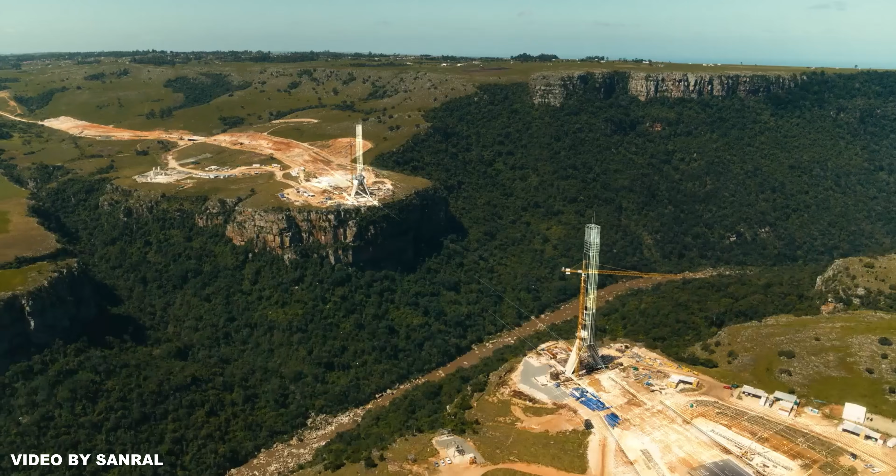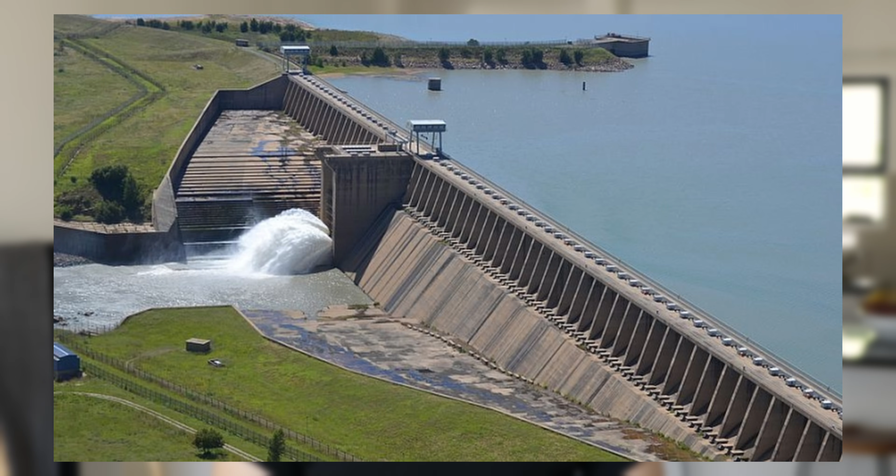I know a lot of the time I talk about old South African infrastructure, things that have been here for a while, pre-1994, but here's something cool that's happening right now.

The N2 Wild Coast project is a major infrastructure development initiative that spans 410 kilometers along the Wild Coast in the Eastern Cape. This project is being undertaken by the South African National Roads Agency, SANRAL as we know it, and is expected to significantly transform the region's transport network and have a socio-economic impact on the landscape there. The project is part of a broader initiative to enhance connectivity, improve road infrastructure, and stimulate development in one of the most economically disadvantaged regions of South Africa.

The new road will link East London to the KwaZulu-Natal border with several upgrades and new road sections to improve access between the Wild Coast and the rest of South Africa. This project is being developed in phases and is expected to be completed in the coming years. When it actually is completed, that's another story, but hopefully it will get completed.

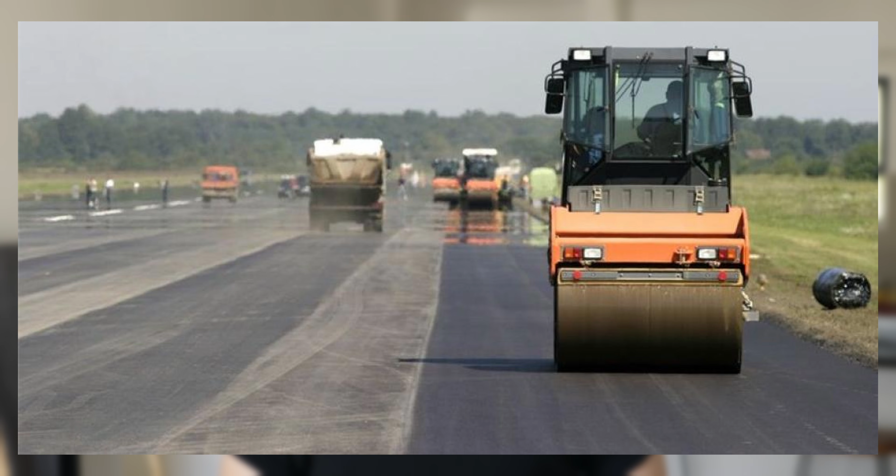There are a few key components of the project, namely upgrading existing roads such as the N2 highway between East London and Mthatha, as well as the R61 road between Mthatha and Ndwalane. These upgrades will improve the quality of the roads, making travel safer as well as more efficient.

Another major aspect of this project is the creation of 96 kilometers of new highways, which will provide a much needed greenfields route across the Wild Coast. Greenfields being where they construct something brand new in an area that hasn't had development before.

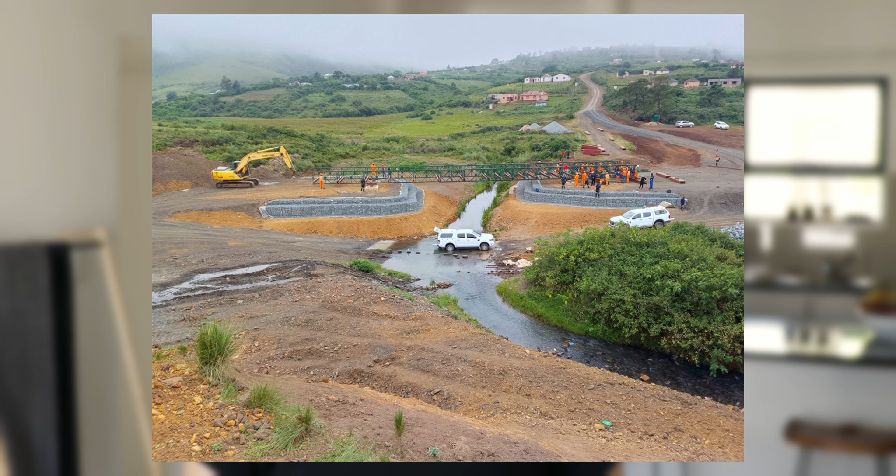As part of this project, new access roads will be built to connect various local communities to the N2 highway, improving accessibility to remote areas. These upgrades are expected to have a major impact on quality of life for residents, making it easier to access health services, schools, and other essential facilities.

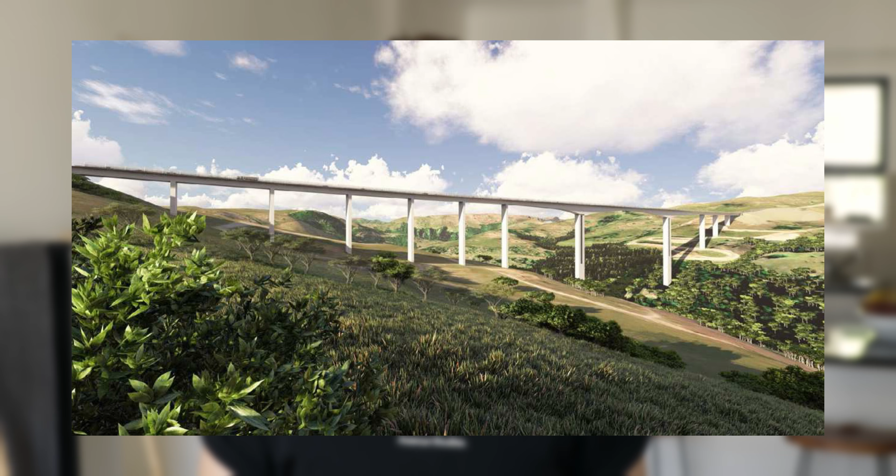The final component of the project is the exciting part, the construction of two massive bridges, the Msikaba Bridge and the Mtentu Bridge. The Mtentu Bridge is set to become the highest bridge in Africa, while the Msikaba Bridge will cross a deep gorge and serve as a vital link in the region's infrastructure.

So let's talk about these cool bridges. I love bridges, they're so fascinating, and they're such an amazing marvel of engineering.

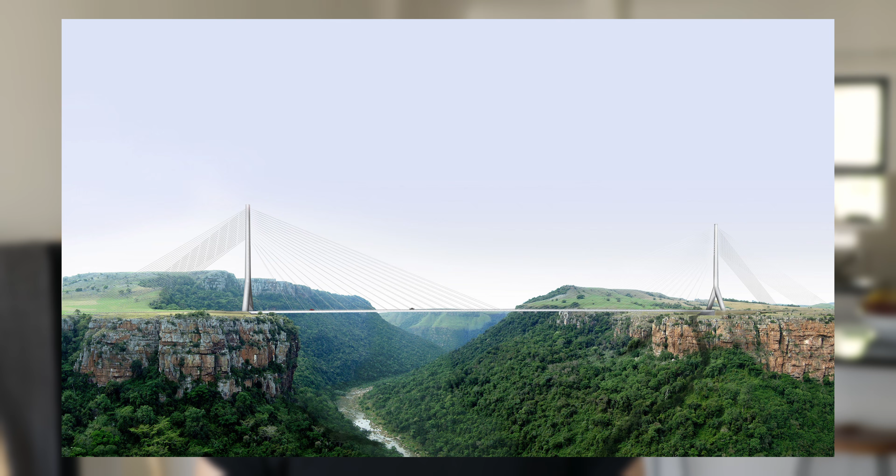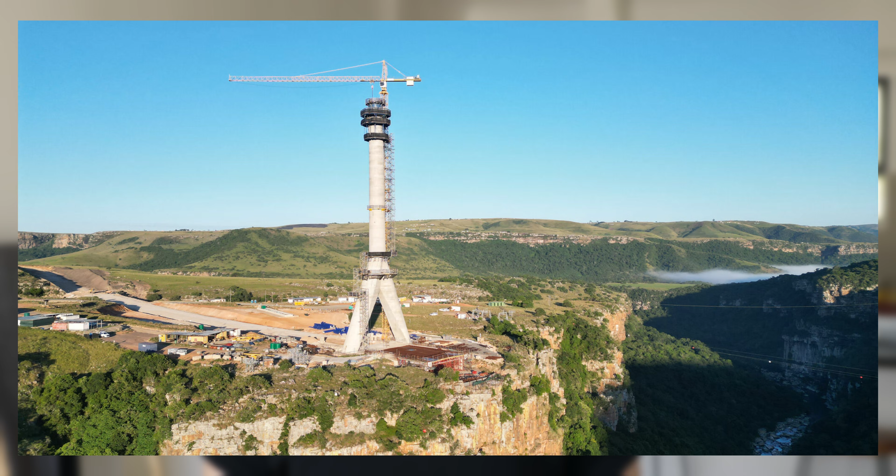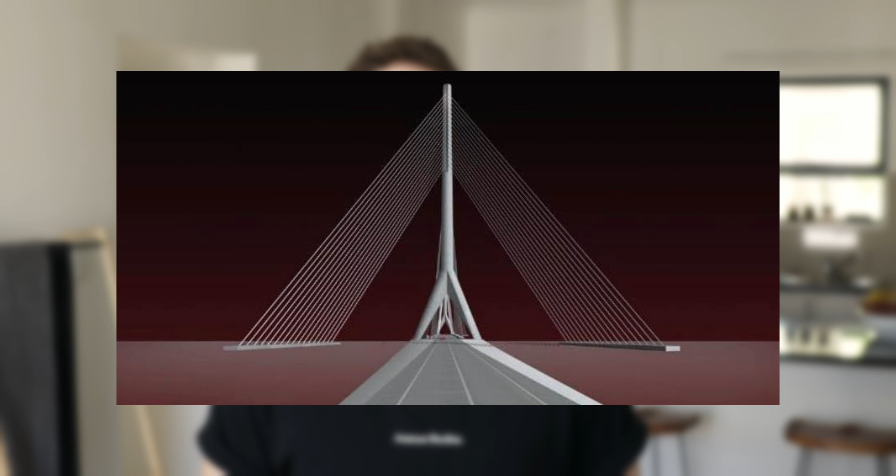Firstly, we have the Msikaba Bridge, which is being built across the Msikaba River. It will span 580 meters across the Msikaba River Gorge. The bridge's design is cable-stayed with inverted Y pylons, which will rise 128 meters above the gorge, making it pretty visually striking. The bridge's anchor blocks are massive structures, each around 17 meters deep and weighing 21,000 tons of concrete. These anchor blocks play a crucial role in supporting the bridge's weight and ensuring its stability.

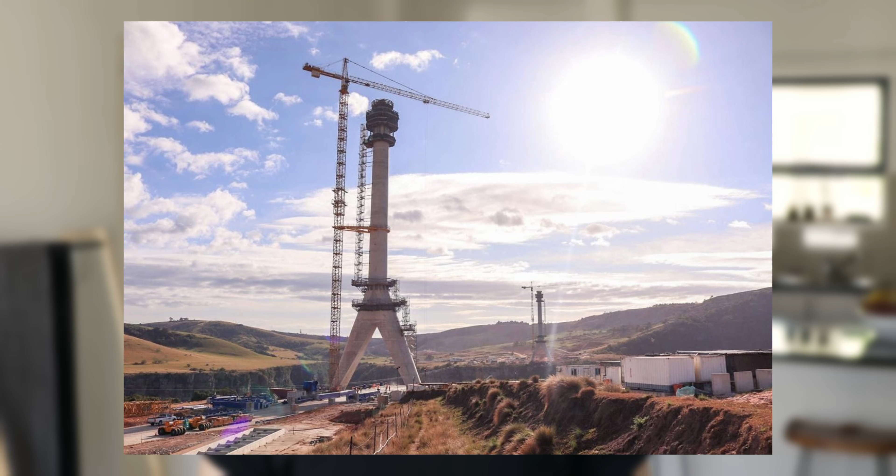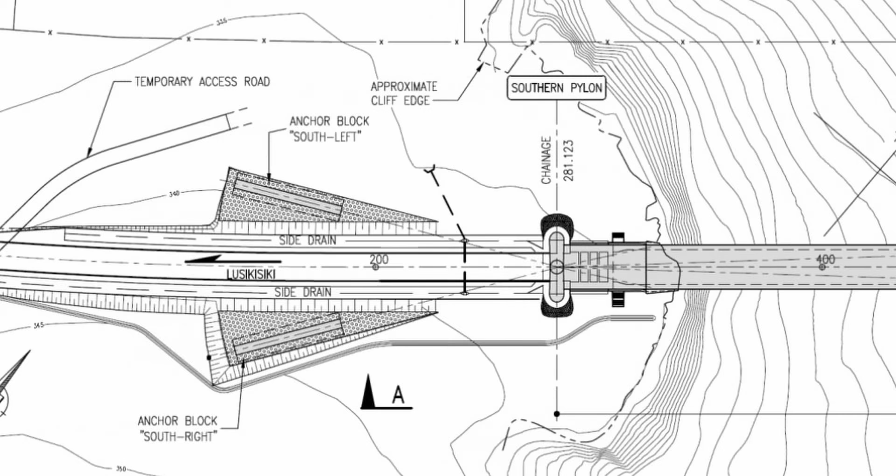Construction on the Msikaba Bridge began in 2020. Cable installation and bridge deck construction are still ongoing today, with expected completion by 2026, hopefully. The project has obviously faced some challenges, particularly related to COVID-19, which delayed materials and construction, as well as the complexity of engineering and the careful planning and coordination required to build such a big project. The importation of materials, such as cables needed for the bridge, added to the logistical challenges surrounding the construction of this project.

The Msikaba Bridge project has generated significant employment opportunities, with local workers from nearby Lusikisiki and other surrounding communities making up 80% of the workforce, which I think is pretty cool. For communities in and around Lusikisiki, the Msikaba Bridge will drastically improve accessibility. Local people who have faced difficulties accessing healthcare, schools, and employment opportunities will benefit from reduced travel time and safer routes.

Obviously, when building a bridge in remote habitats such as this, biodiversity and sustainability studies have to be done, and this area is no exception. The Msikaba River near the bridge is home to a population of over 300 vultures, green and black mambas, as well as special plant species only found in the area, designated as the Pondoland Endemic Heritage Site. So obviously you hope that when these construction projects happen, these have been taken into account, and I think they have in this case.

Moving on to the next bridge, which is the Mtentu Bridge.

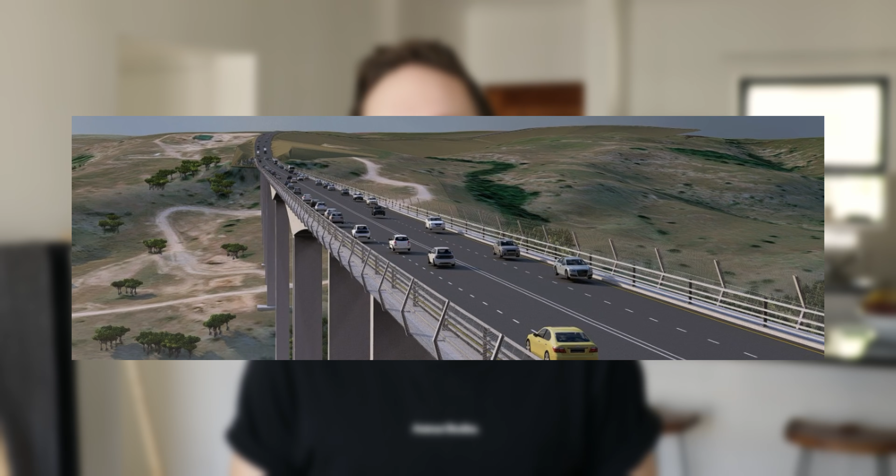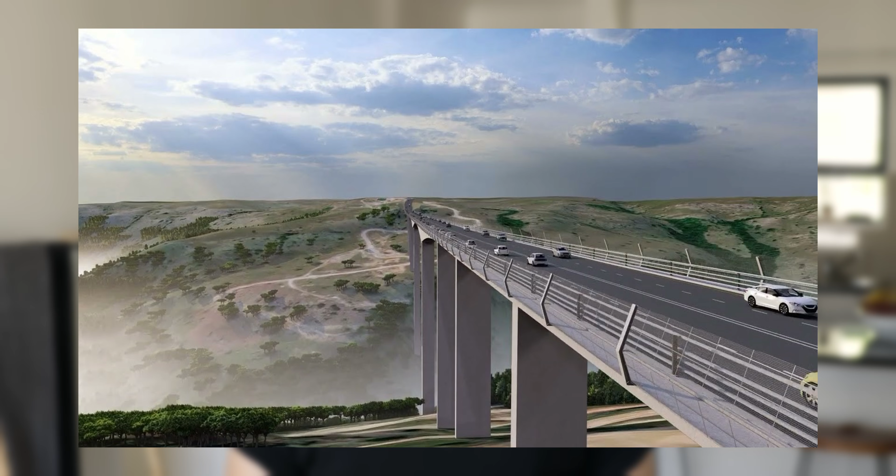This bridge will span the Mtentu River. What is very cool about this bridge is that it has been designed to be the tallest bridge in Africa once completed, surpassing any existing structures in the region. The Mtentu Bridge will stand 223 meters above the Mtentu River. It will also be one of the longest main span balanced cantilever bridges in the world, with a main span of 260 meters. This bridge will have the second longest main span of any bridge in Africa.

Construction of the Mtentu Bridge began in 2019, and it's taking longer than the Msikaba Bridge, so it's expected to be completed sometime in 2027, hopefully. Similar to the Msikaba Bridge, the Mtentu Bridge has also faced challenges related to the complexity of the engineering, the geography of the area, as well as COVID-19, which impacted supply and the labor available to build the bridge.

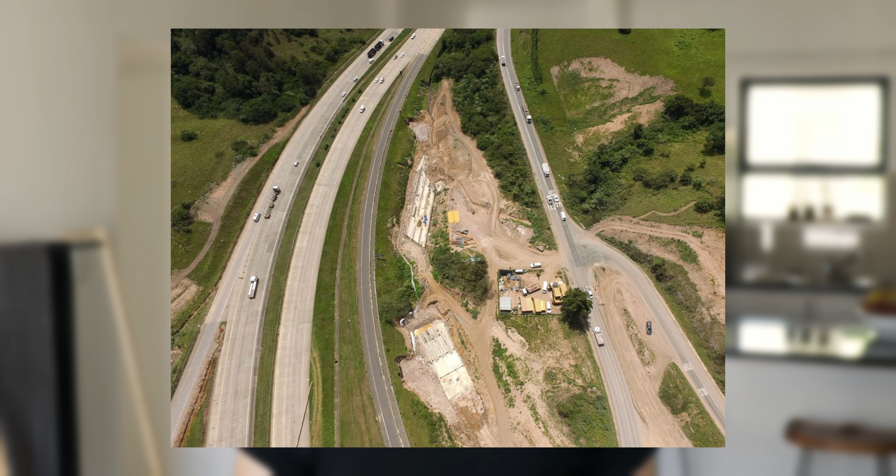Some of the difficulties around this project include displacement. In some cases, people had to be relocated or face displacement due to the construction of the road. This has led to tensions between SANRAL and the affected communities who feel that the benefits of the project might not be evenly distributed or might not directly affect them.

There have also been issues around land ownership. There's been disputes over who owns the land and whether communities receive compensation for living along the routes that have now been taken over. Land claims and disagreements about compensation for those who need to vacate the land for road construction have also caused delays and legal challenges.

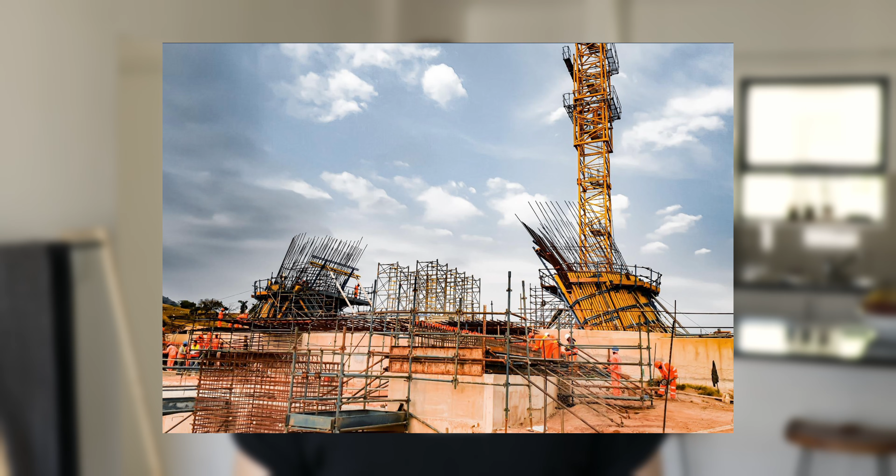The project has also experienced significant cost overruns. The initial budget for the N2 Wild Coast project was estimated at 14.9 billion, but as the scope of work increased and delays occurred, the overall cost has ballooned to more than 20 billion rand. These increased costs have raised concerns about the sustainability and funding of this project, and as taxpayers we wonder, has our money been used wisely for this project?

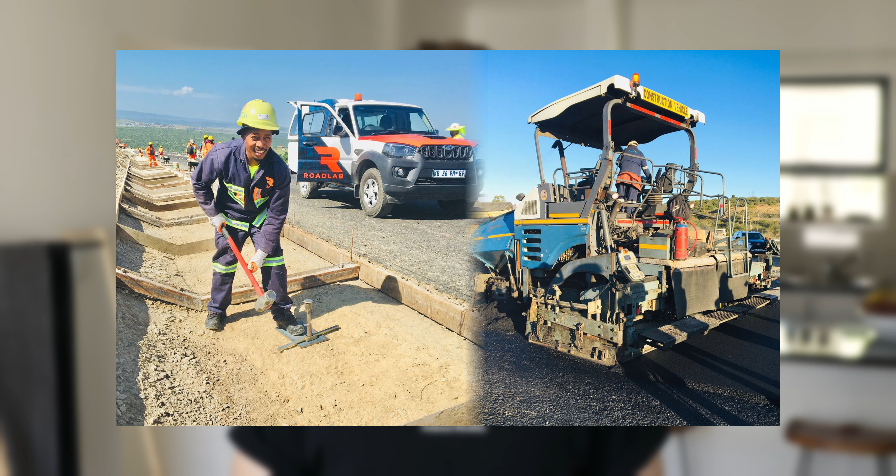There have also been contractual disputes between the construction companies involved in this project, and because of the length of time this project has taken, it has also led to issues such as delayed payments, contractual disputes, and changes to the scope of work. These issues have further delayed the construction schedule.

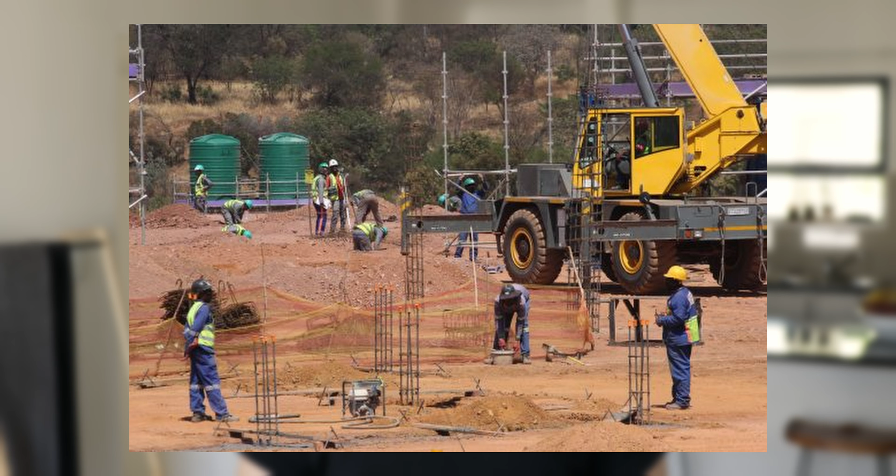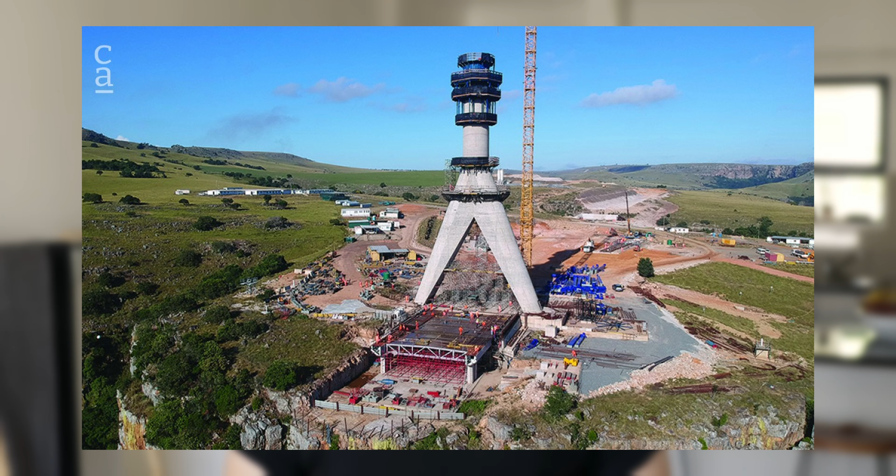Although the project started building in 2019, issues such as construction mafia have led to the project being extremely delayed. But now, interestingly enough, the South African National Defence Force has been called in to assist with this project to make sure it can go full steam ahead without any further delays. So that's kind of interesting—they're using the Defence Force to intervene in this project.

What is pretty cool about this project is that the travel distance between Port St. John's and Port Shepstone will be cut by 80 kilometers, saving up to 2 hours of travel time. That's a huge improvement. This will not only improve efficiency for travelers, but also reduce fuel consumption, making the route more energy efficient and cost saving for travelers.

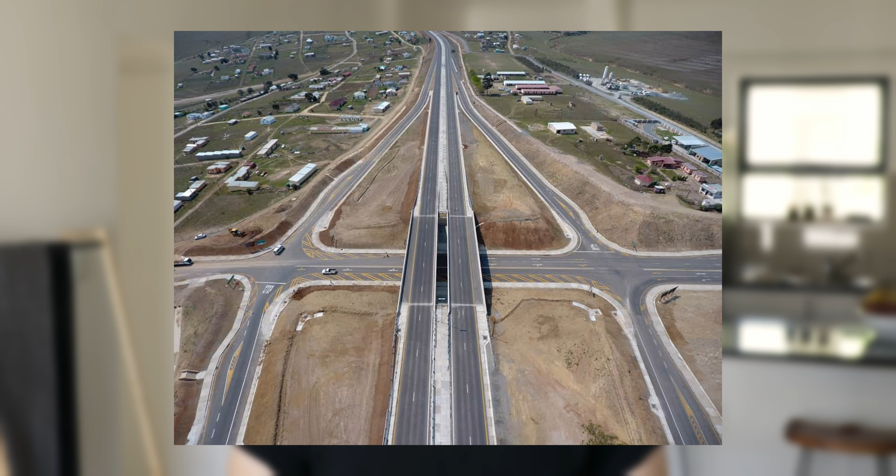The new road will also provide a safer route for travelers by eliminating dangerous curves and steep inclines, which currently make the existing roads prone to accidents. By creating a flatter, more stable route, the road will reduce the risk of accidents and improve road safety for drivers and pedestrians alike. This area has been known to have quite a few accidents and deaths, so that is a huge positive about this project.

So this project is pretty cool, and I'm super proud that South Africa is actually undertaking some new projects that bring about actual progress. I can't wait to actually see these bridges when they're complete, and hopefully when they are finished, I would love to take a trip along the Wild Coast and experience them someday soon. And then I'll film them and show them to you.